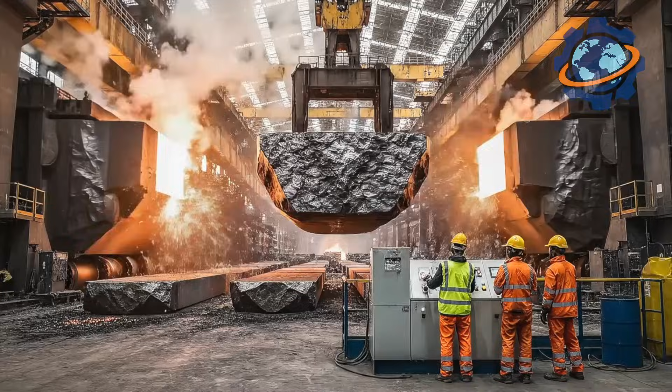Watch liquid steel pour from a ladle, glowing white at 3,000 degrees, bright enough to burn your retinas instantly. 20 tons cascading like a luminous waterfall into molds, each splash throwing sparks 50 feet. This isn't new steel from ore, it's recycled. Yesterday's junked cars, demolished buildings, scrapped appliances melted and reborn.

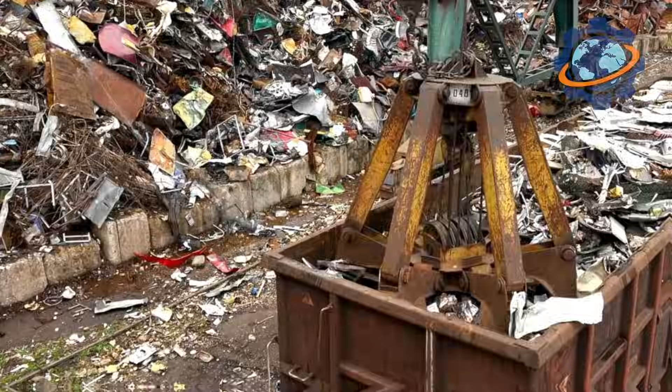America recycles 80 million tons of steel annually, more than all other materials combined. That rebar in your building's foundation? Average age: 73 years through 4 previous lives. How does rusted scrap transform into structural steel stronger than the original? Why does recycled steel outperform virgin steel in crucial applications?

Stay with us. You'll witness industrial-scale alchemy turning garbage into skyscrapers and discover steel's shocking secret. It's infinitely recyclable without quality loss, forever.

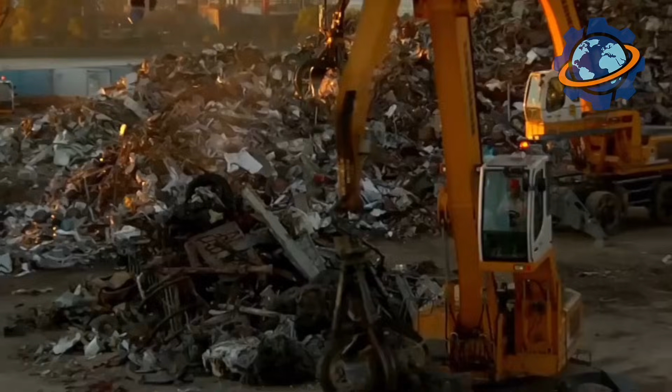Nucor Steel's Berkeley facility in South Carolina processes 3 million tons annually, enough steel to build 15 Golden Gate bridges yearly. The scrapyard stretches half a mile, mountains of metal sorted by type. Shredded cars pile 6 stories high. Railroad rails stack like pickup sticks. Crushed appliances form metal glaciers. Giant cranes with electromagnets strong enough to lift entire automobiles move continuously, sorting, stacking, organizing chaos.

Watch the shredder operation. A hammer mill the size of a 2-story house contains a rotating drum with 50 hammers, each weighing 300 pounds. Cars feed in whole, no disassembly required. In 8 seconds, an automobile becomes fist-sized chunks. The noise defies description, continuous thunder as metal destroys metal.

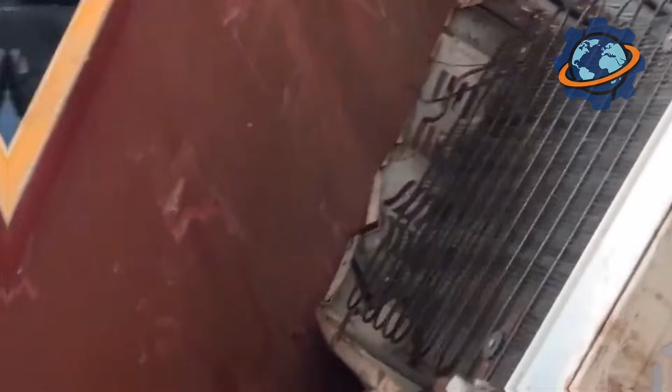The shredder processes 100 cars hourly, 6,000 monthly. Every junked vehicle in America eventually passes through facilities like this. Nothing wastes. Even copper wiring gets separated and recycled independently.

The electric arc furnace, EAF, is where steel is reborn. This vessel, 40 feet diameter and 30 feet deep, operates through electrical violence. 3 graphite electrodes, each 2 feet thick and 15 feet long, descend from the roof. When power flows, 90 megawatts, enough electricity for 70,000 homes, arcs jump between electrodes and scrap, generating temperatures exceeding 5,000 degrees. The initial charge contains 200 tons of scrap steel loaded via overhead buckets.

Operators lower electrodes carefully. Too fast, they shatter. Too slow, productivity suffers. The arc strikes with a deafening crack. Visible through protective glass is blinding white plasma. Metal begins melting immediately. The sound evolves from cracking to roaring as the molten pool forms. Watching through infrared cameras reveals the chaos. Solid metal liquefying, impurities rising as slag. The melt cycle takes 45 minutes start to finish.

Chemistry happens through violence and precision simultaneously. Oxygen lances inject pure oxygen into molten steel at supersonic speeds. The oxygen burns impurities, carbon, sulfur, phosphorus, creating slag that floats atop the denser steel. Temperature reaches 5,800 degrees at the plasma core, hot enough to vaporize iron itself. Cooling water circulates through furnace walls at 5,000 gallons per minute, preventing meltdown.

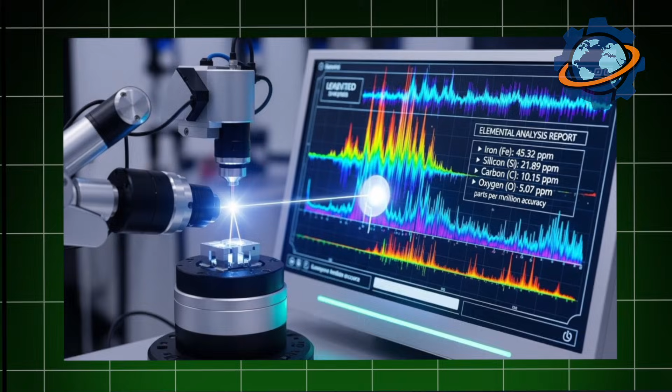Alloying additions fine-tune steel composition. Computer-controlled systems add precise amounts of manganese, chromium, nickel, elements determining final properties. High-strength rebar requires different chemistry than structural beams. The metallurgist's console displays real-time analysis via spectrometer. A laser vaporizes a steel sample. The computer analyzes emitted light, identifying every element present to parts per million accuracy. Adjustments happen in real time. Chemistry perfected before tapping begins.

Tapping releases the dragon. The furnace tilts hydraulically, the massive vessel rotating on trunnions. Molten steel pours through the tap hole into a waiting ladle, a refractory lined bucket containing 40 tons of liquid metal. The pour takes 6 minutes, a continuous stream of glowing steel creating updrafts so powerful they lift dust and debris into the air. The temperature, 3,050 degrees, radiates heat felt 200 feet away.

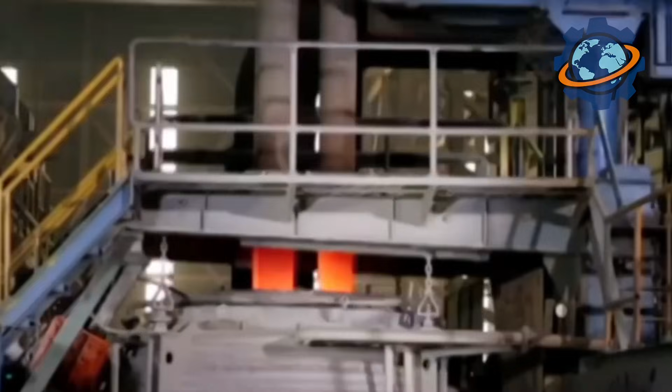The ladle, mounted on a railcar, travels to the continuous caster. This machine revolutionized steelmaking, replacing individual mold casting with an endless process. Molten steel flows from the ladle into the tundish, then into water-cooled copper molds oscillating up and down. As steel contacts the mold, the outer shell solidifies while the interior remains molten. The strand, a continuous ribbon of steel 8 inches square, emerges from the bottom at controlled speed, bent gradually from vertical to horizontal through a roller system.

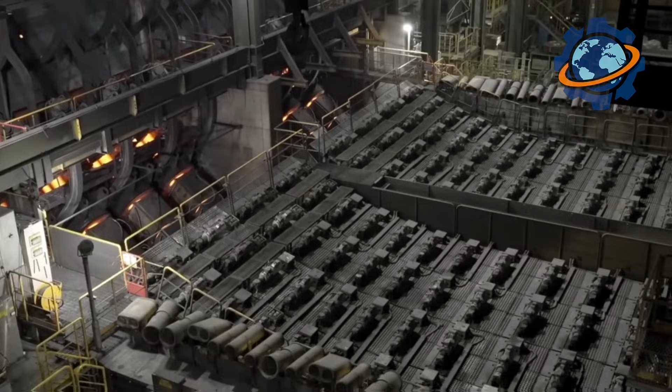The hot rolling mill is where shape is born. The continuous cast billet, still glowing red at 2,000 degrees, enters the roughing mill. Giant rollers, each weighing 30 tons, squeeze the steel, reducing thickness while increasing length. The transformation is violent. 8-inch square becomes flat bar 6 feet wide and quarter-inch thick in 7 passes through successive roller stands.

Watch the mill operation. The steel screams through at 40 miles per hour, extending like taffy as rollers compress it. Water jets cool rollers constantly. Without cooling, the steel would weld itself to roller surfaces. Scale, iron oxide forming on the surface, gets blasted away by high-pressure water, creating a permanent rainbow mist in the mill.

The noise is beyond hearing protection. Low-frequency vibration felt in bones. One operator describes it: steel doesn't want to be flat. We convince it otherwise through controlled violence.

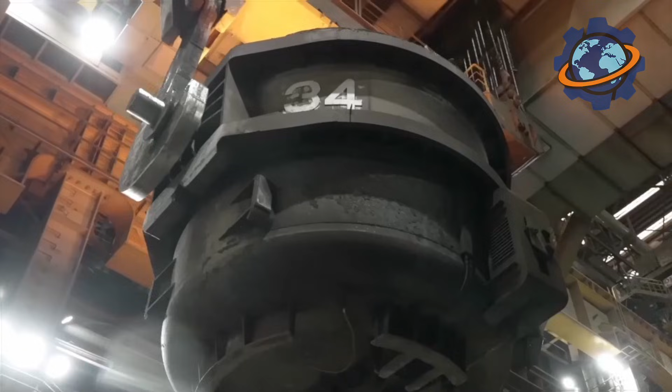Cooling determines final properties through metallurgical magic. After the final rolling pass, steel enters the cooling bed, where water jets precisely control cooling rate. Fast cooling creates hard, brittle steel. Slow cooling produces soft, ductile steel.

Controlled cooling, varying rates across thickness, creates exactly the desired microstructure. Computer systems adjust water flow based on steel grade, thickness, and ambient temperature. The coiler winds finished steel into massive coils, 40 inches wide, 1 mile long, weighing 25 tons.

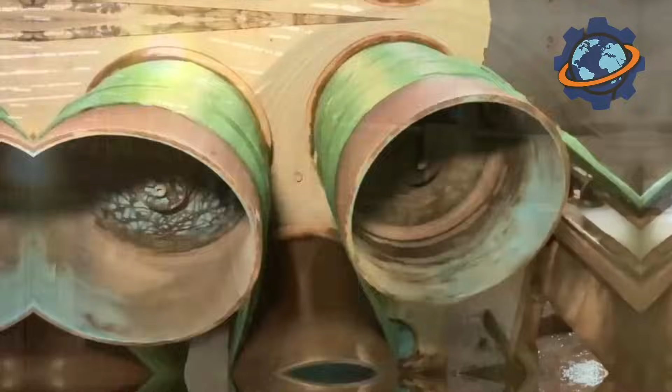These coils ship to manufacturers producing everything from automobiles to appliances. Some steel goes to galvanizing lines where molten zinc coating prevents rust. Other steel gets further processed, cold rolled for precision applications, annealed for formability. But the core material, recycled steel, remains unchanged, ready for another century of service.

Steel recycling accelerated during World War II when scrap drives collected every available piece of metal for weapons production. Post-war, technological advances made recycling economically viable. The electric arc furnace, developed in the 1960s, eliminated the need for iron ore. Recycling became the primary production method.

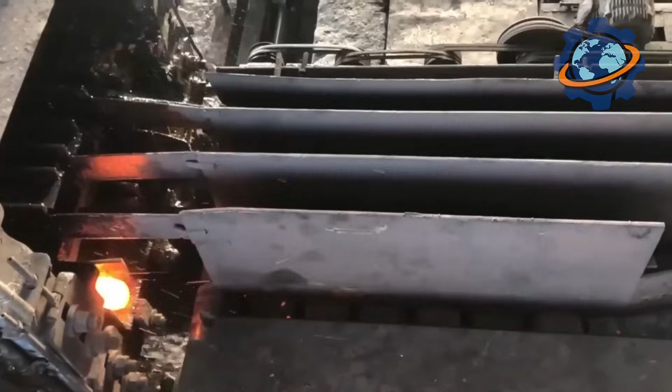By the 1980s, mini-mills using EAF technology revolutionized the industry, undercutting integrated mills using blast furnaces. Today, America produces 70% of steel from recycled scrap. Traditional integrated mills using iron ore and blast furnaces still exist but increasingly rely on scrap supplementation.

The transition reflects economic and environmental reality. Recycling uses 60% less energy than primary production. A single steel mill prevents mining hundreds of thousands of tons of iron ore annually. The industry transformed from extraction to circulation, steel cycling endlessly through the economy.

Carbon emissions dropped 65% using recycled steel versus virgin production. The industry saves $58 billion annually avoiding ore mining and processing. Each recycled ton prevents 4 tons of raw material extraction: ore, coal, limestone combined. Here's the secret we promised.

Steel is infinitely recyclable without degradation. Unlike plastic degrading with each recycle, steel maintains properties indefinitely. That nail holding your wall could have been a Roman sword, railroad spike, Model T chassis, World War II tank, 1960s Cadillac, demolished skyscraper, and now construction steel. Same iron atom serving humanity for millennia.

The crystal structure reforms perfectly during melting, erasing all history. Impurities burn away in the furnace, chemistry optimized through modern metallurgy. From junkyard to job site, the transformation completes. We've created a closed-loop system where waste becomes resource, garbage becomes infrastructure.

That bridge you drove across, those rails carrying freight, the frame supporting your office, all contain steel recycled dozens of times. The metal never tires, never weakens, never remembers its past. We've mastered material that improves through use, strengthened by human engineering beyond nature's intention. Steel isn't consumed. It circulates, eternally useful, permanently valuable, waiting only to be reshaped for its next purpose. Civilization built on metal that refuses to die.

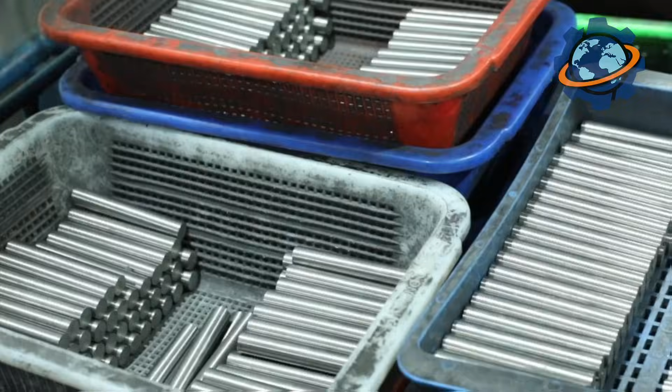Hold a 1-inch tungsten cube. It weighs nearly 1 pound, denser than gold, heavier than lead. Drop it and the floor dents, not the cube. This metal refuses to melt until 6,192 degrees, hotter than Earth's core, beyond the temperature where other metals vaporize.

Light bulb filaments, armor-piercing bullets, rocket nozzles. Tungsten survives conditions that destroy everything else. Yet it starts as dull gray rock, looking worthless. How does brittle ore transform into metal that won't surrender? Why does one nation control 70% of global supply?

Stay with us. You'll witness industrial-scale mining reshaping mountains and discover tungsten's shocking secret. This indestructible metal is so brittle in pure form it shatters like glass.

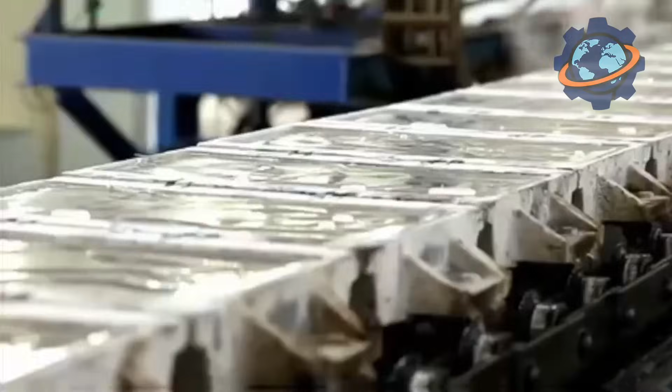The Dayu tungsten mine in Jiangxi, China dominates the landscape. An open pit 3 miles across descending 800 feet into the earth. Giant haul trucks, each carrying 400 tons, crawl spiral roads looking like toys from the rim's edge. This single mine produces 40,000 tons of tungsten concentrate annually, enough to manufacture 2 billion light bulbs. 70% of the world's tungsten comes from Chinese operations like this.

Watch the blast sequence. Drillers bore holes 50 feet deep in geometric patterns across the pit floor. Each hole gets packed with explosives, 200 pounds per hole, hundreds of holes per blast. The detonation ripples across the face in sequence, fracturing 10,000 tons of rock in 30 seconds. Dust clouds billow 300 feet high, visible from orbit. What took nature millions of years to create, humans demolish in half a minute.

The ore, wolframite and scheelite, contains just 0.5% tungsten. That means 99.5% is waste requiring removal. Massive crushers reduce boulders to gravel. Ball mills grind further. Rotating drums containing steel balls pulverize ore to powder finer than flour. The grinding noise is deafening, continuous thunder as metal crushes rock.

Separation uses gravity and magnetism. Wolframite, being dense and magnetic, concentrates easily. Scheelite requires froth flotation. Chemicals make tungsten minerals hydrophobic, clinging to bubbles while waste sinks. The concentrate, now 15% tungsten, ships to processing plants.

China's dominance isn't accidental. They control reserves, processing knowledge, and, critically, tolerate environmental damage Western nations won't accept. Tailings ponds stretch miles, filled with chemical-laced sludge that'll remain toxic for centuries.

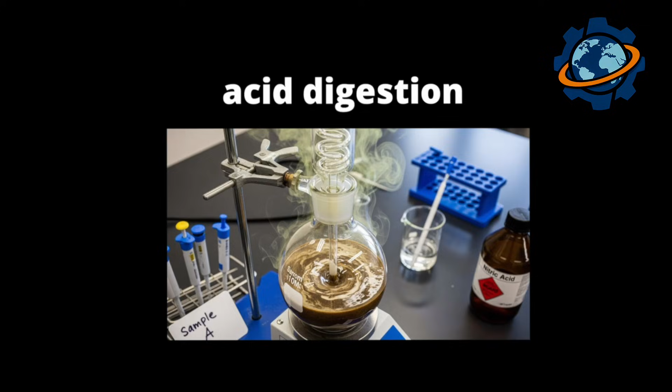Processing concentrate into pure tungsten trioxide requires acid digestion. The concentrate gets dissolved in hydrochloric or nitric acid, violent chemical attack breaking molecular bonds. Tungsten dissolves while impurities precipitate out. The solution, now containing tungsten compounds, undergoes pH adjustment causing yellow tungsten trioxide powder to crystallize.

This powder undergoes hydrogen reduction, the crucial transformation. Inside tube furnaces heated to 1,800 degrees, hydrogen gas flows over tungsten trioxide. The hydrogen strips oxygen atoms, leaving metallic tungsten powder. But here's the challenge. Pure tungsten powder is useless. The particles don't bond. Press them together and they crumble.

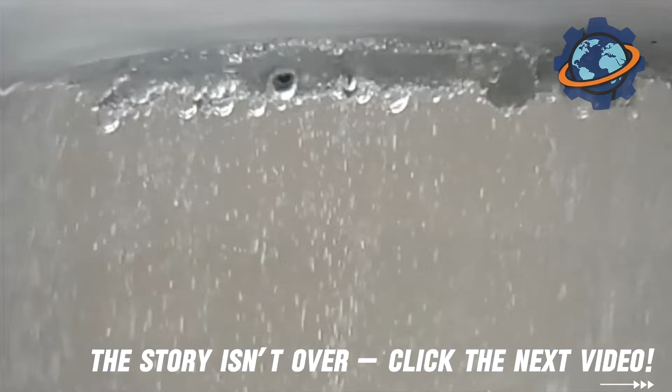Tungsten's ultra-high melting point makes conventional melting impossible. No crucible survives temperatures required. The solution? Powder metallurgy. Powder metallurgy bypasses melting through sintering. Particles fuse below melting point under pressure and heat. Tungsten powder gets pressed into desired shapes using hydraulic presses, generating 50,000 psi. The compacts, called green bodies, are fragile; handle roughly, and they disintegrate.

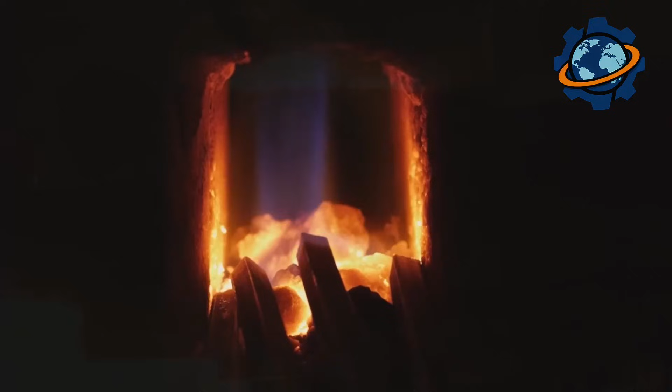The green bodies enter sintering furnaces operating at 4,500 degrees in hydrogen atmosphere. At these temperatures, tungsten atoms migrate across particle surfaces, welding together without liquefying. The process takes 12 hours. What emerges has transformed. The powder compact becomes solid metal with 99% density. Dimensional changes are predictable but significant. Parts shrink 18% during sintering. Engineers must design oversized greens compensating for this shrinkage.

Pure tungsten remains problematic. It's brittle at room temperature, difficult to machine. The solution? Alloying. Adding 2% thorium or lanthanum dramatically improves workability. These elements prevent grain growth during sintering, creating fine-grained structure that machines more easily. The most common tungsten product worldwide is tungsten carbide, tungsten powder mixed with carbon, sintered together. Tungsten carbide achieves hardness second only to diamond.

Cutting tools made from tungsten carbide last 10 times longer than steel equivalents. Mining drill bits, machining inserts, industrial dies. Anywhere extreme wear occurs, tungsten carbide dominates. The material cuts steel like butter but shatters under impact. Drop a tungsten carbide block on concrete and it explodes into fragments. The combination of extreme hardness and extreme brittleness defines tungsten's paradox.

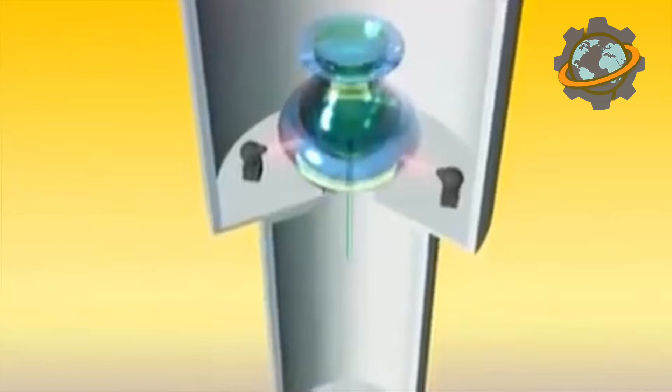Wire drawing demonstrates tungsten's remarkable properties. The sintered tungsten gets heated to 3,000 degrees and drawn through progressively smaller diamond dies. The wire diameter reduces from 1/4 inch to thousandths of an inch, thinner than human hair for light bulb filaments. This drawing process work hardens tungsten, increasing strength. Modern LED lights made tungsten obsolete for household illumination, but specialty applications remain.

Electron microscopes, X-ray tubes, high-temperature furnace elements. Anywhere electricity must flow through extreme heat, tungsten wire delivers. The element's resistance increases with temperature, making it self-regulating. In light bulbs, hot filament resists current flow, limiting power draw and preventing burnout from voltage spikes. That wire glowing white-hot at 6,000 degrees, tungsten operating at 70% of its melting point, yet lasting thousands of hours.

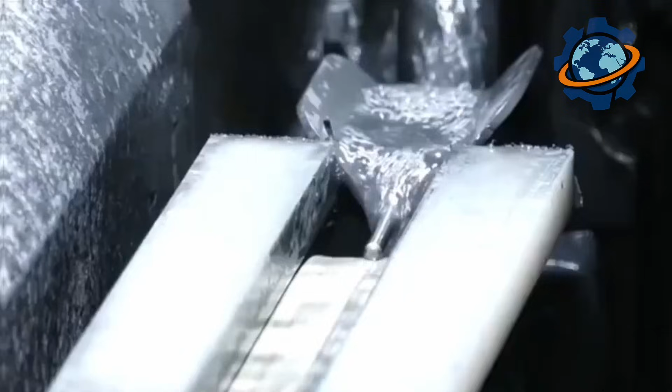Military applications drive demand relentlessly. Tungsten's density, 19.3 grams per cubic centimeter, nearly identical to gold, makes it ideal for kinetic penetrators. Armor-piercing ammunition uses tungsten or tungsten alloy cores. Fired from tank cannons at 5,000 feet per second, these projectiles punch through steel armor through sheer mass and velocity, not explosive force. The ethical controversy is intense.

Depleted uranium performs similarly but raises radioactivity concerns. Tungsten offers equivalent performance without radiation, but mining's environmental cost is staggering. Each ton of tungsten requires processing 200 tons of ore, generating mountains of toxic waste. The metal that survives Earth's most extreme conditions is extracted through processes poisoning the planet.

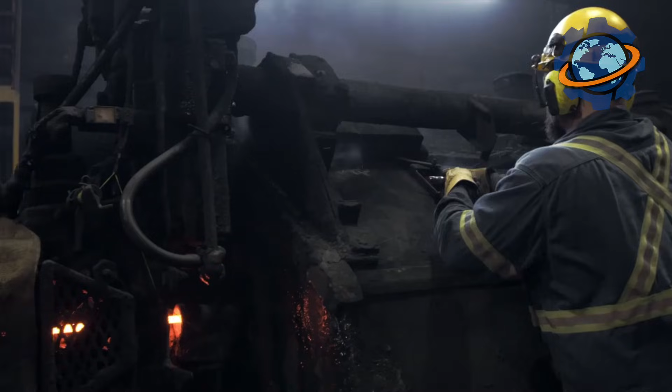Swedish chemist Carl Scheele identified tungsten oxide in 1781, studying the mineral scheelite. Spanish brothers Juan and Fausto Elhuyar isolated metallic tungsten 2 years later. The name derives from Swedish tung sten, heavy stone. For a century, tungsten remained a laboratory curiosity. Everything changed when Thomas Edison needed light bulb filaments in 1879. He initially used carbon, which burned out quickly.

By 1904, manufacturers switched to tungsten, revolutionizing electric lighting. World War I revealed tungsten's military value. High-speed steel cutting tools containing tungsten enabled mass production of weapons. Today's annual production exceeds 90,000 tons, with China dominating supply chains so completely that Western nations consider tungsten a strategic vulnerability.

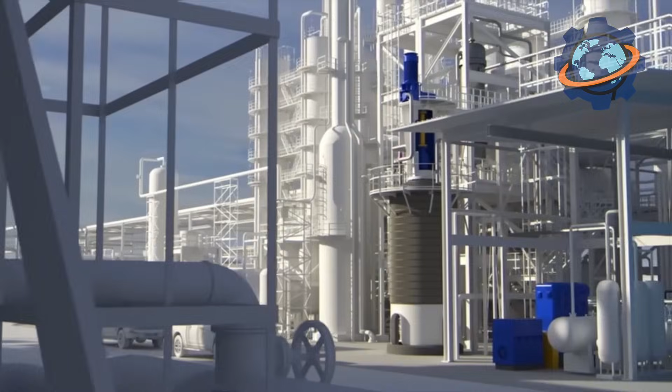Carbon emissions remain problematic as tungsten production generates 8 tons of CO2 per ton of metal, primarily from energy-intensive processing. Recycling exists but remains limited. Only 30% of tungsten gets recycled, far below rates for aluminum or steel.

Here's the secret we promised. Tungsten's incredible strength comes from its weakness. Pure tungsten is brittle, shattering easily. But that brittleness stems from its crystal structure. Atoms packed so tightly that dislocation movement, the mechanism allowing metals to deform, essentially stops.

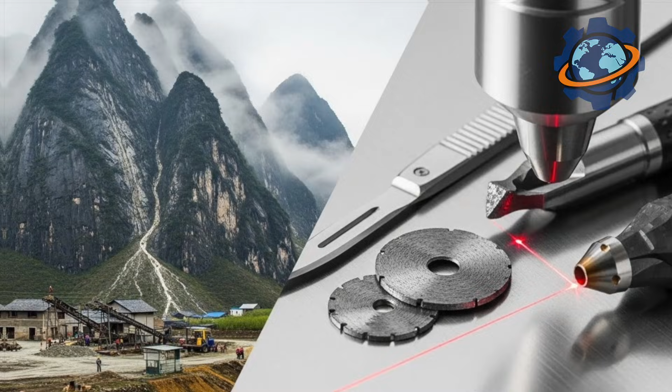This atomic rigidity creates the highest melting point, extreme hardness, and resistance to deformation. The metal survives temperatures melting steel because its atoms simply refuse to move. Adding trace elements creates enough flexibility for workability while maintaining strength. From Chinese mountains to cutting edges worldwide, the transformation completes. We've mastered metal that defies conventional metallurgy, processing it through techniques developed when melting proved impossible.

That drill bit cutting through rock, that filament glowing white-hot, that armor-piercing bullet, all share tungsten's fundamental contradiction. The strongest metal is also the most fragile. The element that won't melt is useless without powder metallurgy. We've learned to work with nature's extremes by accepting, not fighting, inherent limitations. Tungsten doesn't compromise. Neither do the engineers who've learned to shape it.

But they extract it unusually. Zinc is vaporized at 1,800 degrees Fahrenheit, and the vapor is collected. Yes, the metal turns into gas. How do they turn gray ore, mined a mile underground, into a bluish-silver metal that sacrifices itself for others? You'll learn why the ore burns in furnaces, how they collect metallic vapor, and why without zinc, the entire infrastructure of the planet would collapse.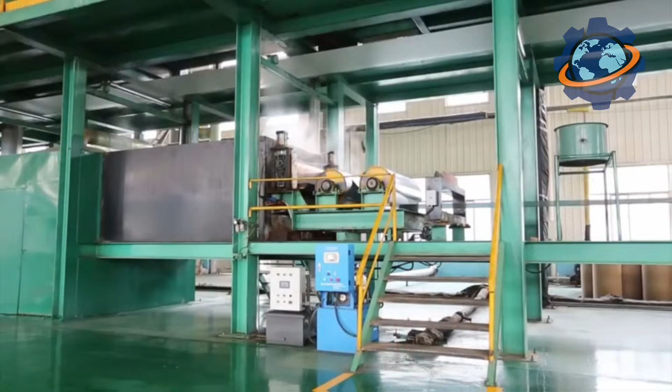Watch to the end. The finale will show what's behind every galvanized beam. This is the story of the bodyguard metal that took on the corrosion of the entire world.

A mile underground, darkness, explosion, tons of rock crash down. This is a zinc mine, one of hundreds around the world where ore for the guardian metal is extracted every day. Underground dump trucks with 50-ton capacity haul ore to the mine shaft. An elevator the size of a house lifts the rock to the surface. The ore is dark, almost black. This is sphalerite, zinc sulfide. Crystals with diamond-like brilliance, but the metal content is only 10 to 15%. The rest is waste rock.

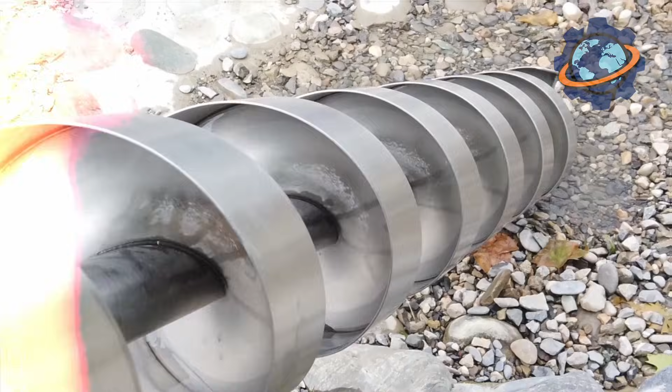Trucks carry the ore to the processing plant. The transformation from stone to metal begins. Massive cone crushers as tall as a 3-story building grind ore chunks the size of cars. The noise is deafening. The rock is crushed into gravel the size of fists. Then the gravel goes into ball mills, rotating steel drums 16 feet in diameter, filled with steel balls the size of watermelons. The drum rotates, balls fall, grinding the ore into fine powder. After 8 hours of grinding, you get gray dust, particles the size of sand grains.

The ore powder is mixed with water, creating gray liquid slurry called pulp. It's pumped into huge flotation machines, tanks with volumes of 3,500 cubic feet. Chemical reagents are added, foaming agents and collectors. Mixers are turned on and air is fed from below. The magic of flotation begins. Millions of air bubbles rise through the pulp. Particles of sphalerite, zinc ore, stick to the bubbles and float up. A gray foam forms on the surface, 20 inches thick. This foam contains zinc. Waste rock settles to the bottom and is drained off.

The foam is collected, filtered, dried. The result is concentrate, powder containing 50 to 60% zinc. From 100 tons of ore, you get 10 to 15 tons of concentrate. This concentrate is loaded into rail cars and shipped to the smelting plant. There begins the real alchemy, turning powder into molten metal. And this is a process where metal turns into vapor.

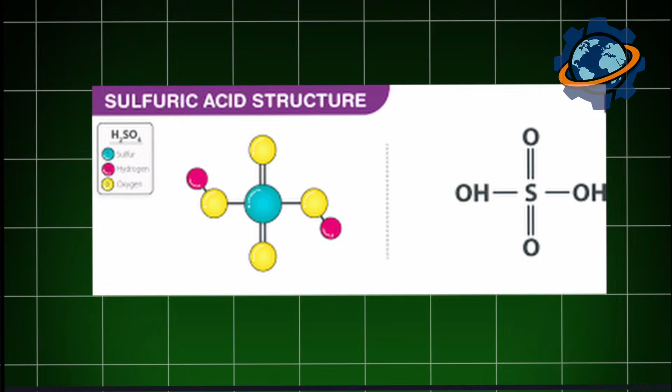Sulfur gas flies up the stacks. It will be captured and turned into sulfuric acid. And zinc sulfide transforms into zinc oxide, a gray-white powder. The temperature in the furnace is so high that the walls glow red. The roasted concentrate, zinc oxide, is cooled and mixed with coke, crushed coal. The proportion: 3 parts oxide to 1 part coke.

This mixture is loaded into vertical retort furnaces, steel towers 50 feet tall, lined inside with refractory silicon carbide. Heating begins. Temperature starts climbing. 1,800 degrees, 2,000 degrees, 2,200 degrees. At 2,200 degrees Fahrenheit, carbon begins taking oxygen away from zinc oxide. A reduction reaction occurs. But something amazing happens.

Zinc doesn't melt. Its boiling point is only 1,665 degrees, but the furnace is at 2,200. So zinc immediately turns into vapor, metallic vapor. Inside the furnace, atoms of gaseous zinc are flying around. The vapors rise up and exit the furnace through piping. They enter a condenser, a special cooled chamber.

Temperature in the condenser is around 840 degrees, below boiling point but above melting point of zinc. The vapors condense. Drops of molten zinc settle on the condenser walls, glowing orange. Liquid metal flows down the walls and collects in a receiver. This is crude zinc, contains impurities of lead, cadmium, iron. Purity around 98%. Each furnace produces up to 100 tons of zinc per day.

The metal is cast into molds. The result is ingot bars weighing 55 pounds each, silver gray with a bluish tint. For some applications, pure zinc is needed. Then it's refined, purified by distillation. Crude zinc is heated to boiling in a vacuum furnace. Under reduced pressure, boiling point drops to 1,300 degrees.

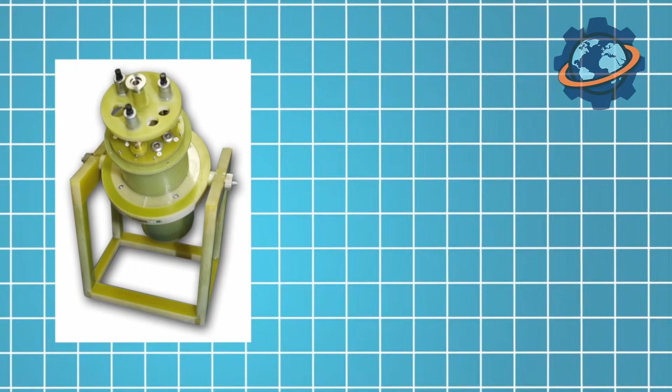Zinc vaporizes while impurities remain solid. Zinc vapors are condensed in a cooler. The result is refined zinc with 99.99% purity. This zinc is cast into ingots. On the ingot surfaces, a characteristic pattern forms, crystalline designs resembling frost flowers on glass. This is called zinc flowers.

Ingots are stacked. Zinc is ready for use, but its main application awaits in hot dip galvanizing baths. There, steel products will receive corrosion protection. The process looks impressive, like baptism of metal by fire. A steel beam 40 feet long is immersed in a bath of molten zinc. Temperature 840 degrees. The beam completely disappears in the silvery liquid.

Chemical reaction begins instantly. Zinc reacts with iron on the steel surface, forming a layer of intermetallic compounds, a solid alloy of zinc and iron. This layer bonds permanently to the steel. On top, a layer of pure liquid zinc. The beam is held in the bath for 1 to 2 minutes. Then it's pulled out. Excess molten zinc drains back.

In air, the coating quickly solidifies. The surface becomes silvery, matte, with the characteristic pattern of crystals, zinc flowers. Coating thickness from 2 to 8 thousandths of an inch. That's just fractions of an inch, but it's enough. The galvanized beam won't rust for 50 to 70 years. Even scratches aren't scary. Zinc continues protecting.

It's about electrochemistry. Zinc is more active than iron. When corrosion begins, zinc oxidizes, not steel. Zinc sacrifices itself, protecting iron. This is called cathodic protection. World production of galvanized steel, 55 million tons annually. This uses 6 million tons of zinc. Without zinc, modern cities would be impossible. 70% of zinc goes to protecting steel. But there are other applications.

Brass, an alloy of copper and zinc, has been known for thousands of years. Contains 15 to 45% zinc. Golden, strong, easily worked. Brass is used for plumbing fixtures, musical instruments, cartridge cases, decorative items. Zinc die casting, a method for manufacturing complex parts for automotives and electronics. Molten zinc is injected under pressure into steel molds. The result is complex-shaped parts accurate to tenths of thousandths of an inch.

Zinc batteries, still used by the billions. Zinc powder in chemical industry. Zinc oxide in rubber industry, cosmetics, medicine. Zinc ointment heals wounds. World zinc mining, 14 million tons per year. China produces 40%, 5.5 million tons. Peru, Australia, USA, India, other major producers. Zinc price, around $3,000 per ton.

The history of zinc as a separate metal began late. Europeans knew brass since ancient Rome, but couldn't obtain pure zinc. The problem, zinc evaporates when heated. Indian and Chinese metallurgists in the 16th century learned to condense zinc vapors in closed retorts. In Europe, pure zinc was obtained by German chemist Andreas Marggraf in 1746. But mass production began in the 19th century.

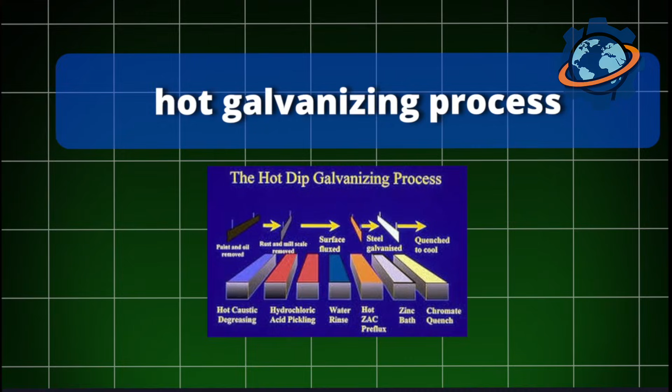Revolution happened in 1836 when French engineer Stanislas Sorel discovered the hot galvanizing process. He found that immersing steel in molten zinc protects from corrosion. This changed construction forever. Before galvanizing, steel structures rusted within years. With galvanizing, they serve for decades. The Eiffel Tower is painted, but many bridges from that era are galvanized and still standing. Today, without galvanized steel, skyscrapers, bridges, power lines, ships are impossible. Zinc, the invisible guardian of infrastructure.

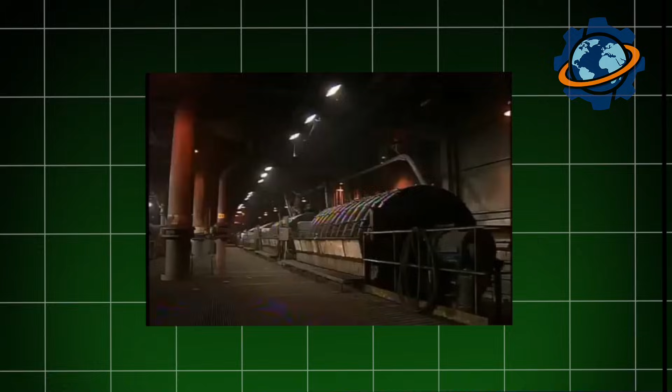And so, having traveled from explosions a mile deep through giant crushers and flotation tanks, through fluid bed furnaces at 1,650 degrees and retort towers at 2,200, through transformation into metallic vapor and condensation, zinc emerges, the bodyguard metal of modern civilization. The silvery metal that sacrifices itself, protecting steel from rust. The fourth largest metal by production on the planet, without which all infrastructure would collapse.

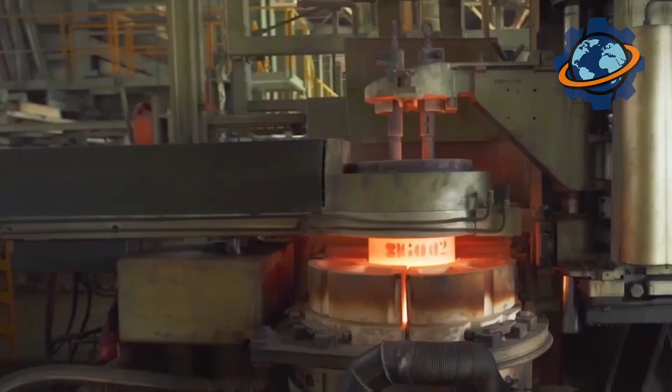Every time you see a steel bridge beam, a roofing sheet, or a car body, know they're protected by a thin layer of zinc as thick as a human hair. A layer that takes on corrosion, oxidizes instead of steel, slowly destroys itself, saving the structure. This is a story of nobility at the atomic level, how one metal protects another, sacrificing itself.

From underground explosions to silvery skyscraper beams, zinc's journey spans several weeks and 2,200 degrees. The metal that vaporizes to protect, that oxidizes so others don't rust. The invisible shield of 14 million tons annually, standing between steel and corrosion. Zinc. This is why bridges don't collapse, roofs don't leak, and cars don't turn to dust in 5 years. The guardian metal, the sacrificial metal, the metal without which the modern world would simply fall apart from rust.

Every second, jet engines spinning at 12,000 revolutions per minute thrust hundreds of passengers across continents. But here's what defies physics. Inside those engines, turbine blades made of nickel alloy operate at 3,000 degrees Fahrenheit, temperatures exceeding their own melting point by 200 degrees. Picture holding ice cubes in boiling water without them melting. That's the metallurgical miracle happening 35,000 feet above your head.

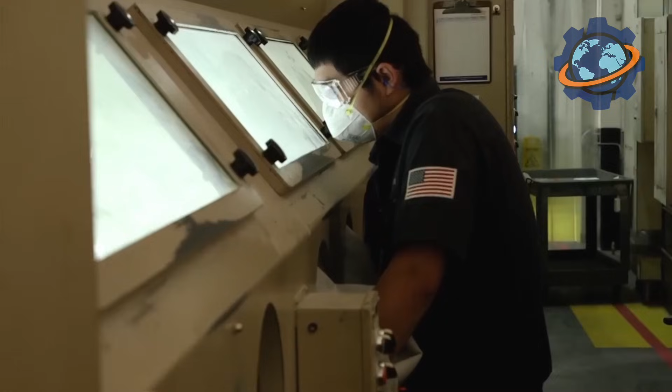How does metal survive temperatures that should liquefy it? How do engineers grow crystals larger than your hand from molten metal? Stick around till the end, you'll discover the jaw-dropping secret of single crystal manufacturing that eliminated metal's greatest weakness, and why a single turbine blade costs more than your car, yet lasts 20 years in literal hell.

The story begins in specialized foundries where clean room standards rival semiconductor fabs. These facilities maintain air purity of less than 100 particles per cubic foot, 10,000 times cleaner than normal atmosphere. Even microscopic dust particles cause catastrophic flaws in turbine blades spinning at speeds where centrifugal forces generate stresses exceeding 70,000 pounds per square inch. That's pressure crushing steel like aluminum foil.

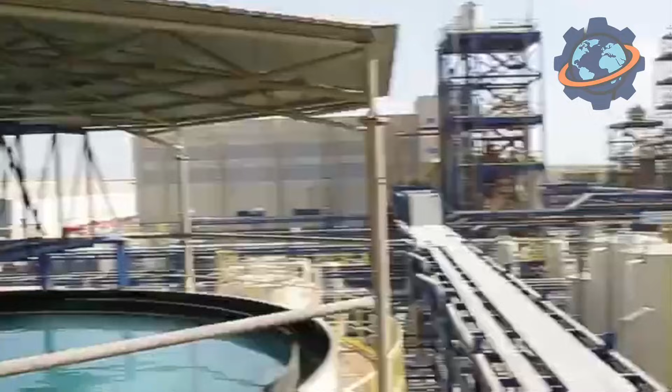Workers suit up in full-body cleanroom gear before entering casting halls. Inside, massive vacuum furnaces standing 2 stories tall and weighing 80 tons create environments replicating outer space. Vacuum pumps evacuate air until pressure drops to 1/1,000,000th of atmospheric pressure. At these conditions, materials behave differently. Impurities vaporize instantly. Gases trapped in metal escape, leaving behind purity impossible at normal pressure. Processing single batches costs $50,000 in electricity alone.

Next comes mold preparation, where ceramic shells, think pottery on steroids, get built layer by microscopic layer. Technicians dip wax patterns shaped like turbine blades into ceramic slurry 10 times, waiting hours between coats. Each layer adds thickness thinner than human hair. After 20 days of coating and drying, workers melt wax away in autoclaves, leaving hollow ceramic molds with internal channels more complex than human circulatory systems.

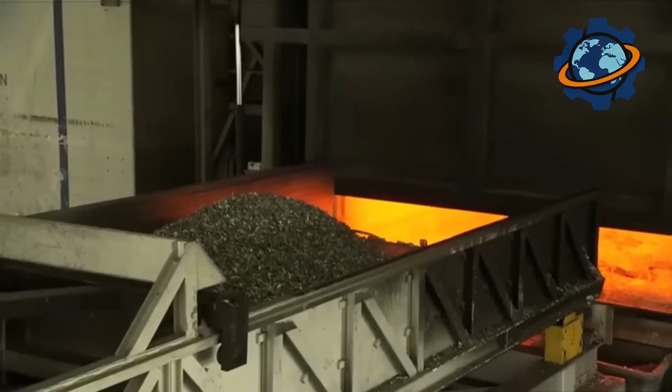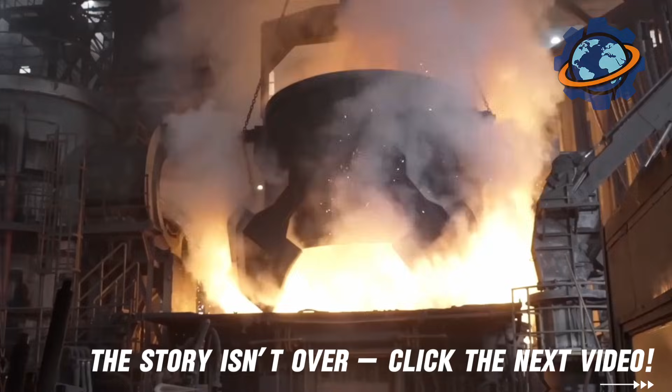Giant crucibles containing nickel-based superalloy, mixtures of nickel, chromium, cobalt, aluminum, titanium, plus 6 other elements in exact proportions. Heat to 2,700 degrees Fahrenheit. Picture liquid metal glowing white like miniature stars captured in ceramic containers. This superalloy, developed through decades of research, contains more expensive elements per pound than fine jewelry. A single turbine blade uses materials costing $800 before any manufacturing begins.

Robotic arms lower ceramic molds into this molten inferno with precision measured in thousandths of inches. Timing matters critically here. Pour too fast, turbulence creates defects. Too slow, metal solidifies prematurely. Furnaces tilt at exactly 2 degrees per second, filling mold cavities in 17 seconds. During this pour, metal temperature drops 300 degrees, requiring computer-controlled heating to maintain consistency. One temperature fluctuation of 5 degrees ruins the casting, wasting months of preparation.

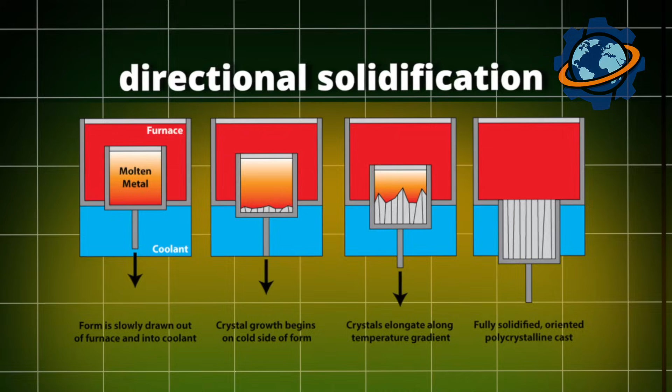Now comes the magic, directional solidification. The filled mold sits atop a water-cooled chill plate at 70 degrees Fahrenheit while surrounded by heating elements maintaining 2,400 degrees above. This creates the steepest temperature gradient in metallurgy, over 2,000 degrees difference across 6 inches. That's transitioning from Arctic to volcanic conditions in the space between your thumb and pinky.

Slowly, incredibly slowly, a computer-controlled mechanism lowers the mold through the furnace at speeds of 6 inches per hour. Picture watching paint dry, then slowing that down tenfold. As the mold descends, metal solidifies from bottom upward in a razor-thin freezing front. This directional cooling forces crystal growth in one direction only, upward, eliminating horizontal grain boundaries where cracks normally form.

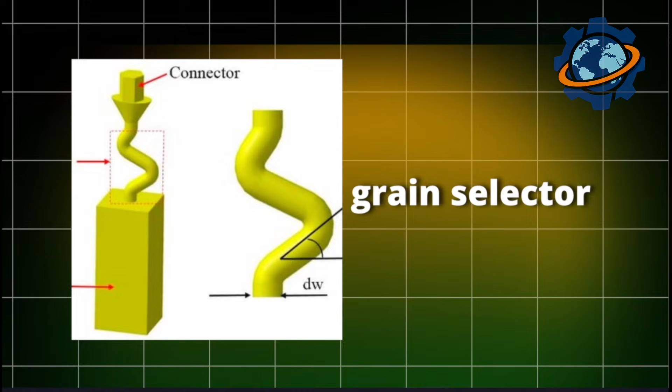The process takes 14 hours for a 4-inch blade. Rush it by even 10% and polycrystalline grains form, destroying blade strength. But here's where physics becomes art. At the mold bottom sits a grain selector, a corkscrew-shaped passage so narrow only one crystal nucleus fits through.

As metal solidifies upward, countless tiny crystals form at the chill plate. They compete, growing upward like metallic trees racing toward sunlight. Most hit the spiral walls and stop. Only the perfectly aligned crystal, the one matching the spiral's orientation, passes through this metallurgical gauntlet.

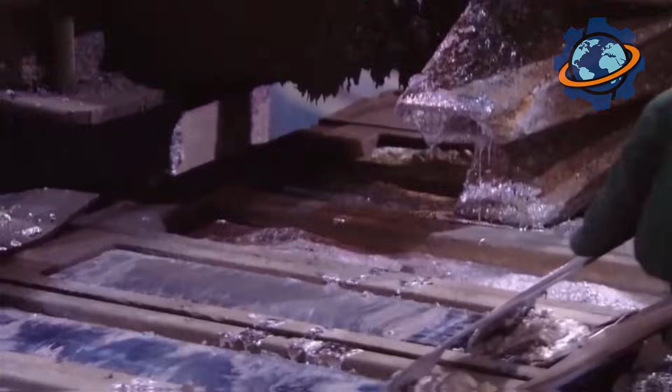This step is critical because it ensures the entire blade, every atom from root to tip, belongs to one continuous crystal lattice. No grain boundaries exist anywhere. Normal metals contain millions of grain boundaries per cubic inch. Single crystal blades contain 0.

Without boundaries, there are no weak spots where atoms slip past each other under stress. The crystal structure extends uninterrupted through the entire blade like a three-dimensional molecular Kevlar vest, with atoms locked in perfect geometric formation.

After solidification, blades undergo solution heat treatment at 2,200 degrees Fahrenheit for 2 hours, then quench in inert gas. This locks crystal structure permanently and precipitates microscopic strengthening phases throughout the lattice. Next comes aging heat treatment, multiple cycles at precisely controlled temperatures that cause nanoscale particles to form.

These particles, called gamma-prime precipitates, occupy 70% of the alloy's volume. Picture this. Imagine a three-dimensional checkerboard where hard particles pin the crystal lattice, preventing atoms from sliding. These precipitates remain stable at temperatures where other metals liquefy.

They're the secret allowing nickel alloys to maintain strength at 3,000 degrees, temperatures where aluminum vaporizes, titanium melts, and even steel becomes taffy. The heat treatment process takes 96 hours of precise temperature control. Deviate by 15 degrees at any point and mechanical properties drop 40%.

Coating application transforms already sophisticated blades into thermal protection systems. First, a metallic bond coat, aluminum-rich alloy, gets applied via high-velocity plasma spray at 20,000 degrees Fahrenheit. Metal particles accelerate to twice the speed of sound, impacting the blade surface with such force they cold weld instantly. This creates a rough surface for subsequent layers while providing oxidation resistance.

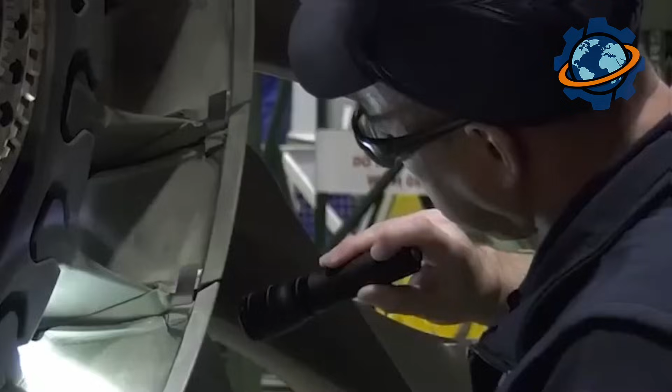Then comes the thermal barrier coating, yttria-stabilized zirconia ceramic applied atom layer by atom layer using electron beam physical vapor deposition. In vacuum chambers, electron beams vaporize ceramic ingots. The vapor condenses on rotating blades, building up a coating 0.08 of an inch thick with a columnar microstructure full of microscopic pores. These pores act like thermal insulation, trapping air pockets that reduce heat transfer.

The ceramic coating lowers blade temperature by 400 degrees, the difference between survival and meltdown. Modern engines couldn't exist without this coating technology. This wasn't always possible. Back in 1940, early jet engines used cast iron turbine blades lasting 20 hours before failure. Temperatures barely reached 1,400 degrees Fahrenheit.

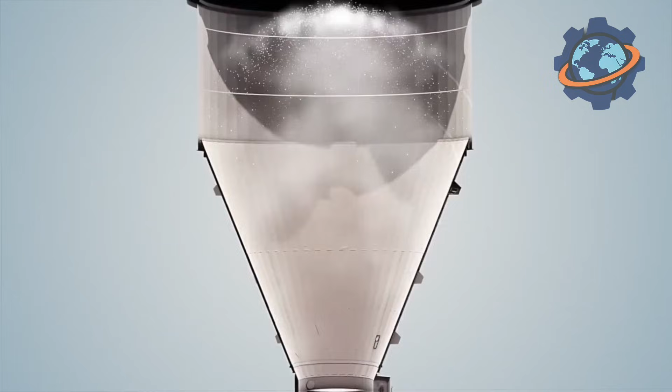The breakthrough came when Pratt & Whitney researcher Frank VerSnyder invented directional solidification in 1966, eliminating transverse grain boundaries and doubling blade life overnight. The true revolution arrived in 1982 when General Electric and Pratt & Whitney independently perfected single crystal casting. Turbine inlet temperatures jumped from 2,000 degrees to 3,000 degrees Fahrenheit, a 50% increase enabling massive efficiency gains.

Modern turbofan engines achieve fuel efficiency triple that of 1960s designs. Today, advanced engines like the GE9X powering Boeing 777X aircraft operate at 3,200 degrees, with pressure ratios reaching 60:1. These engineering advances cut aviation fuel consumption by 65% per passenger mile over 50 years.

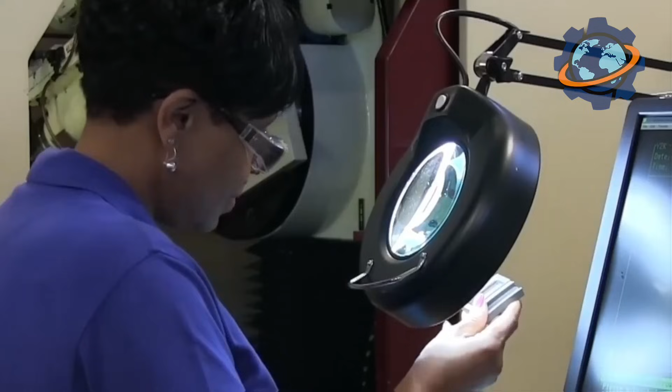Carbon emissions drop by 12% when replacing older turbine blades with modern single crystal versions in existing engines, equivalent to removing 18 million cars annually from global fleets. Airlines save over $47 billion yearly through improved fuel efficiency. Maintenance costs drop 58% because single crystal blades last 3 times longer than conventional ones.

So here's the secret promised. These blades don't actually survive above their melting point through material strength alone. They're actively cooled by air bled from the compressor, flowing through those microscopic internal channels at supersonic speeds.

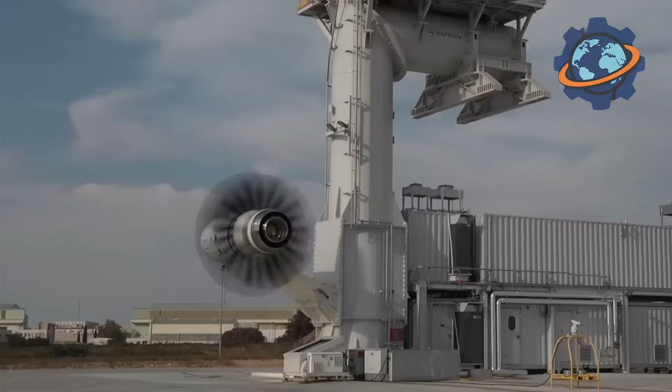This cooling air, already compressed to 400 degrees Fahrenheit, seems hot by human standards, but runs ice cold compared to the 3,000-degree combustion gases outside. Combined with ceramic coatings reflecting heat like mirrors, the actual metal temperature stays below 2,000 degrees, hot enough to glow orange, but survivable. From molten metal to flying miracles, the cycle completes.

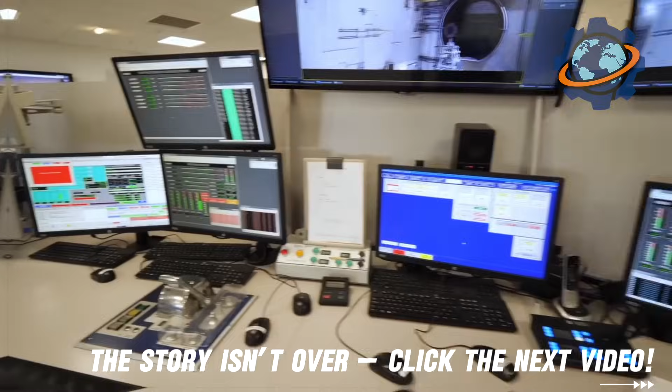Single crystal turbine blades represent humanity's most sophisticated metal casting achievement. Objects where every atom's position matters, where crystal orientation determines survival, where manufacturing tolerances make computer chips look crude. We've engineered metal to survive in conditions nature never intended, creating materials that work at their physical limits. That's not just manufacturing, that's molecular architecture enabling the modern world's ability to shrink distance itself.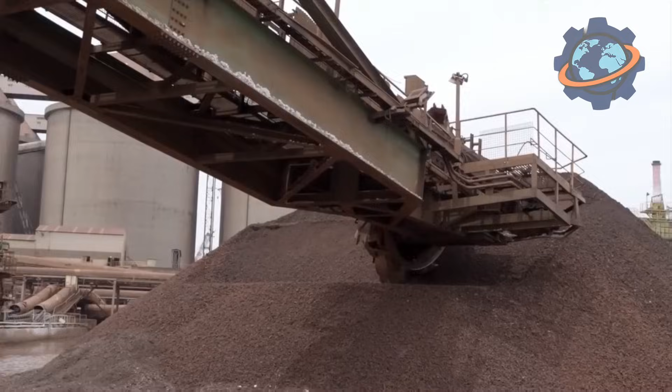How does rust-colored rock transform into gleaming steel skyscrapers? How do ancient mountains become modern civilization? Stick around till the end. You'll discover why iron shaped human history more than gold ever did, and the jaw-dropping secret hiding inside every bridge, car, and building around you right now.

The story begins in Western Australia's Pilbara region, where iron mountains stretch across landscapes older than dinosaurs. Massive excavators, standing 8 stories tall, picture buildings that walk, tear into rust-red cliffs with bucket teeth weighing 12 tons each. These mechanical giants rip through rock layers formed 3 billion years ago when Earth's oceans first rusted.

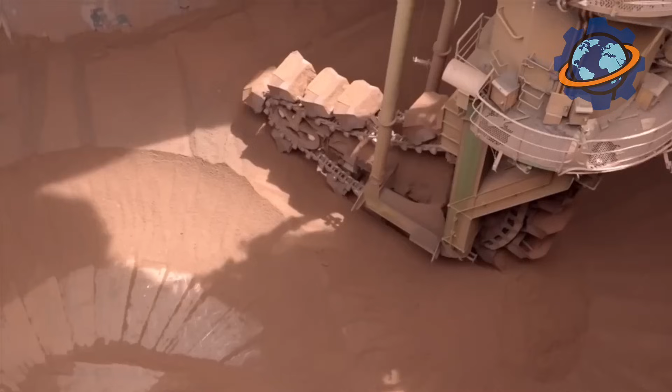With thunderous crashes echoing across 40-mile-wide craters, each excavator loads haul trucks carrying 400 tons per trip. That's the weight of 80 elephants moving at 40 miles per hour on tires taller than basketball hoops. Processing 30 million tons annually from single mines, enough iron ore to build 12 Golden Gate bridges every single day.

Next comes crushing, where house-sized jaw crushers, imagine dinosaur mouths made of hardened steel, pulverize boulders into gravel-sized chunks. With deafening roars splitting eardrums even through protection, these crushers generate forces exceeding 20,000 pounds per square inch. Clouds of red dust billowing upward create artificial sunsets visible from space satellites.

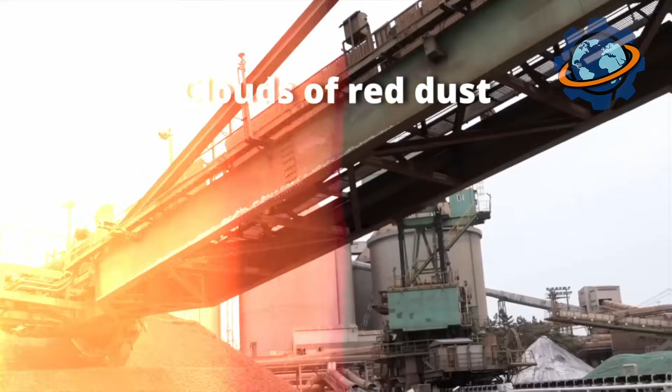Conveyor belts stretching 12 miles long, longer than Manhattan, transport crushed ore at 18 miles per hour. Workers riding inspection carts traverse distances requiring 25 minutes one way. That's enough belt to wrap around 300 football fields. Every hour, 50,000 tons flow through this system, weight equivalent to 5 Eiffel Towers moving continuously past checkpoints.

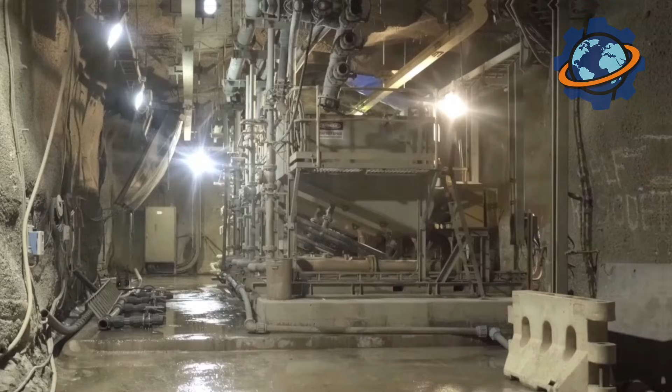Giant grinding mills, standing 5 stories tall, with diameters matching Olympic swimming pool widths, pulverize rock into fine powder. Inside these rotating drums, 20-ton steel balls, each weighing more than shipping containers, tumble with ore, creating grinding thunder heard miles away. Operators monitor vibrations. Wrong frequencies mean catastrophic bearing failures, costing millions.

At rotation speeds creating gravitational forces triple normal Earth gravity, particles shrink to powder finer than talcum. Processing 8,000 tons hourly, that's filling semi-truck after semi-truck every 30 seconds. This powder, called concentrate, contains 65% iron. Magnetic separators then extract iron particles using forces strong enough to levitate railroad spikes, leaving waste rock behind.

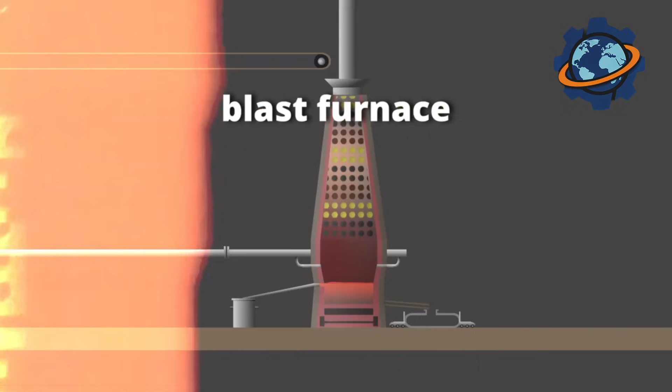Next comes the blast furnace, a towering inferno standing 30 stories high, its steel shell glowing dull orange even from outside. At internal temperatures exceeding 3,000 degrees Fahrenheit, hot enough to vaporize aluminum instantly, iron ore transforms into liquid metal. Picture Dante's Inferno engineered with precision. Measured charges of iron ore, coke, and limestone descend from the top, while superheated air blasts upward at 2,000 degrees from ring-shaped nozzles called tuyeres.

This creates a raging chemical storm, where carbon monoxide rips oxygen from iron oxide molecules. The reaction releases enough heat to melt granite. Every 3 minutes, sensors check 20 different parameters. Without precision, furnaces explode with force demolishing city blocks. The blast furnace operates continuously for 15 years, never cooling, never stopping, like Earth's core relocated to industrial facilities.

Inside this chemical reactor, materials descend through distinct zones. Upper regions preheat incoming ore. Middle zones drive off moisture and carbon dioxide. Lower depths become hell itself, where iron liquefies. At the hearth bottom, molten iron collects at 2,800 degrees Fahrenheit, dense as lead but flowing like water.

Every 4 hours, workers drill through clay-plugged tap holes. Liquid iron erupts in blinding white rivers, flowing through ceramic channels into railroad cars holding 300 tons each. This step is critical because timing determines metal purity. Tap too early, slag contaminates. Too late, furnace pressure ruptures containment walls.

After tapping, slag, lighter impurities floating atop molten iron, gets diverted into separate channels. This glowing amber liquid, essentially liquefied rock, contains calcium, silicon, and aluminum oxides stripped from ore. Rather than waste, it becomes roadbed material and cement ingredient recycled at 98% rates globally.

The molten iron, called pig iron, contains 4% carbon, too brittle for construction. Picture glass that looks metallic. Drop pig iron from waist height, it shatters into fragments.

Next comes the basic oxygen furnace, where pure oxygen blasted at supersonic speeds through 3-foot diameter lances burns away excess carbon in 17 minutes. Flames shooting 70 feet high, temperatures hitting 3,200 degrees, create hurricane-force winds inside steel vessels holding 350 tons of liquid metal.

Steelmaking requires precision rivaling brain surgery. Computer-controlled oxygen flow adjusts by milliseconds. Operators add exact amounts of manganese, silicon, chromium, elements changing steel properties dramatically. Too much carbon, steel cracks in winter cold. Too little, metal bends under load.

Picture this: alloying elements get injected via submerged lances. Electromagnetic stirring, invisible but powerful, homogenizes composition. Samples extracted every 3 minutes get analyzed via spectrometers, determining chemistry within seconds. Modern furnaces achieve carbon content accuracy to 0.01%, difference between skyscraper standing or collapsing.

After refining, liquid steel flows into continuous casting machines producing slabs 30 feet long, weighing 25 tons at rates of 1 slab every 90 seconds. This wasn't always so advanced.

Back in ancient Anatolia around 1300 BC, Hittite metallurgists discovered heating iron ore with charcoal produced workable metal. That breakthrough, accidental furnace conditions reaching iron's melting point, changed human civilization forever. Iron tools outperformed bronze, enabling agriculture revolution.

The breakthrough came when British inventor Henry Bessemer patented his converter in 1856, slashing steel production time from 24 hours to 17 minutes. Suddenly, steel costs dropped 90%. This single invention built modern cities. Skyscrapers, bridges, railroads exploded across continents.

Today, global steel production exceeds 1.9 billion tons annually. That's enough to build 75,000 Eiffel Towers yearly, or manufacture 43 million automobiles, or construct bridges connecting every coastline on Earth.

Carbon emissions drop by 62% when using recycled steel versus virgin ore, equivalent to removing 12 million cars annually. Industry saves over $80 billion yearly through scrap recycling. Processing costs drop 43% because melting scrap requires 1/3 the energy of blast furnaces.

So here's the secret promised: every ton of steel you see, bridges, buildings, cars, will be recycled indefinitely. Unlike plastic decomposing into microparticles or paper pulping into mush, steel never degrades. Magnetic separation extracts it perfectly from demolished structures.

That girder in your office building might contain steel from 1930s locomotives. Your car's frame could include battleship armor from World War II. Nothing disappears. Metal merely transforms, reborn eternally. From ancient mountains to modern marvels, the cycle completes.

Iron, humanity's most essential metal, circulates through civilization like blood through veins. We're not consuming Earth's iron, we're borrowing it, briefly, before passing it forward to futures we'll never see.

Every year, the world melts over 1 billion tons of pig iron. But where does all that fiery metal come from? Imagine a giant furnace as tall as a 35-story skyscraper that never sleeps. Its guts glow like the Earth's core, and the temperature hits 3,600 degrees Fahrenheit. That's 2,000 Celsius. This is a blast furnace.

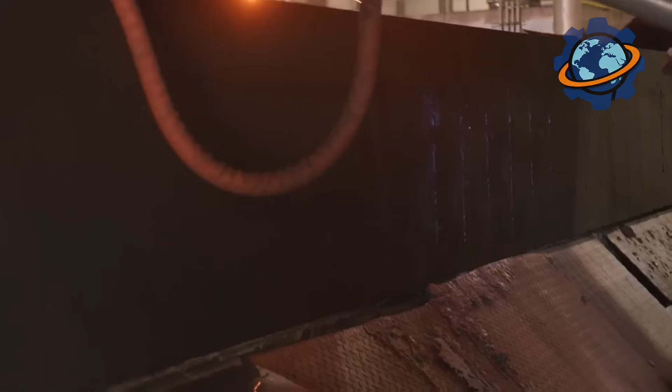They don't just melt metal here. They give birth to the heart of industry. But there's a secret that only the guys standing at the tap hole know. If you stick around to the end, you'll find out what's really happening in the center of this burning fortress, and why it changes everything.

Imagine a colossal tower, taller than a 35-story skyscraper. The ground beneath your feet vibrates slightly from its relentless work, and the air is filled with a hum, like the breathing of a giant beast. At night, its top glows, pushing back the darkness.

This is a blast furnace, a massive vertical smelter where 24 hours a day, 7 days a week, the magic of turning ore into metal happens non-stop. Why blast furnace? The name comes from the process itself, and it's no accident. The whole secret to a blast furnace is the constant blast of incredibly hot air that fuels the fire and kicks off all the necessary reactions.

If you were to slice a blast furnace open, you'd see it looks like a stretched out bottle. Every part of it has a name and a purpose. The walls of the furnace are lined with special refractory bricks, capable of withstanding temperatures that would melt solid rock. This is a true fortress, built to tame fire itself.

So what do they feed into this fiery throat? The process is like cooking from a very strict recipe. The mix of ingredients loaded into the furnace is called the charge. Here are its main components: iron ore, fuel, coke, and fluxes.

What's next? This is where it gets interesting. Two streams move towards each other. From the top, the layers of the charge slowly descend, and from the bottom, a hurricane of superheated gases rushes up to meet them. It all starts at the bottom, in the hearth. Through special pipes called tuyeres, air heated to a scorching 2,200 degrees Fahrenheit, 1,200 Celsius, is blasted into the furnace under huge pressure. That's hotter than volcanic lava.

Meeting the red-hot coke, the oxygen in the air instantly ignites. The temperature in this zone skyrockets to 3,600 degrees Fahrenheit, 2,000 Celsius. This creates carbon dioxide. But as it rises higher and passes through new layers of coke, it turns into another gas, carbon monoxide. And this gas is the real oxygen thief.

As this searing hot stream of gas rises up the furnace shaft, it envelops the chunks of ore and begins to greedily rip the oxygen from them, leaving behind reduced, spongy iron. The reduced iron continues its journey downward into hotter and hotter zones. It passes through the glowing layers of coke and, like a sponge, begins to soak up its carbon. And here's where something amazing happens.

Pure iron melts at a very high temperature of 2,800 degrees Fahrenheit, 1,530 Celsius. But soaking up carbon dramatically lowers that melting point. That's why a blast furnace doesn't produce pure iron, but an alloy of iron and carbon, pig iron, which becomes liquid at just 2,200 degrees Fahrenheit, 1,200 Celsius.

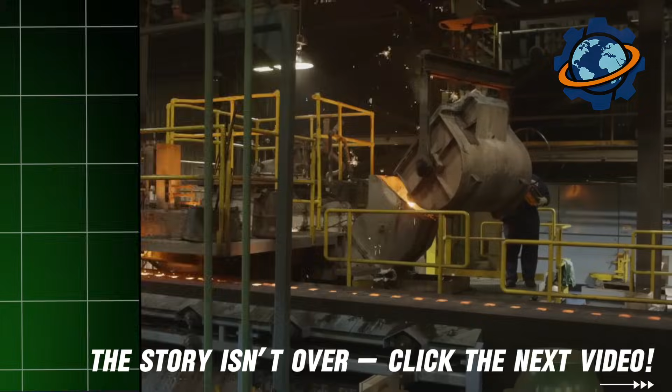Roughly every 40 to 60 minutes, enough liquid products have collected in the bottom of the furnace. It's time for the climax, a truly mesmerizing sight. A furnace worker, the keeper, uses a special drill to punch open a hole in the furnace wall, the tap hole. First, they tap the slag. It's lighter than the iron, so it floats on top. It's a molten, lava-like mass that flows into special ladles.

And then they open the iron tap hole, and a dazzling, sparking stream of molten metal erupts with a roar. This is the River of Fire. The temperature of this stream is around 2,700 degrees Fahrenheit, 1,500 Celsius. It flows down special troughs, bathing everything around in a blinding light, and fills giant ladles that look like railway tankers. Each of these ladles holds hundreds of tons of liquid metal.

From here, the pig iron will be sent to its next stage, either poured into molds or, more often, sent for further processing into steel. A blast furnace is an amazing operation that produces more than just pig iron. The byproducts are just as important. The blast furnace slag, which we've already mentioned, becomes a valuable raw material for making cement, building blocks, and road aggregate after it's cooled and crushed.

The blast furnace gas that comes out of the furnace isn't just released into the atmosphere. It's cleaned of dust and used as fuel to heat the very same air that's blasted back into the furnace. It's a closed-loop system that makes the process more economical. Without a doubt, metallurgy is a serious challenge for the environment. However, modern technologies are constantly evolving. When blast furnaces are modernized, powerful filters and cleaning systems are installed to capture dust and harmful gases.